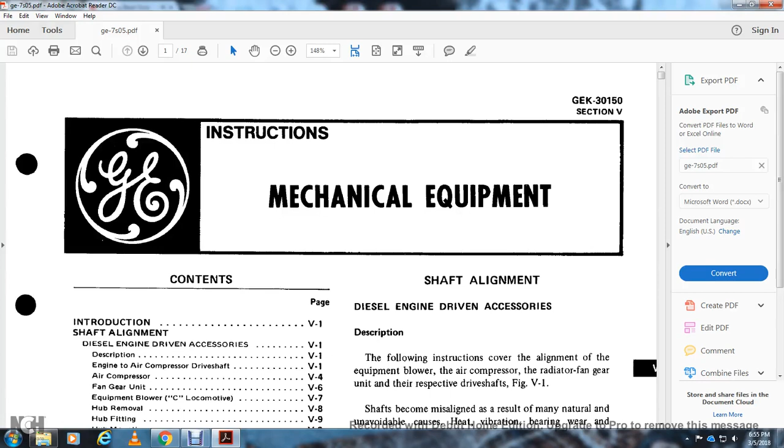General Electric Dash 7 Series, Section 5, Instruction, Mechanical Equipment.

Introduction, shaft alignment, diesel engine driven accessories description: engine to air compressor drive shaft, air compressor fan gear unit equipment blower, C locomotive hub removal, hub fitting, hub mounting data, equipment blower B locomotive, cab heater description, electrical circuits, operation, safety device, removal of heater, removal of fan motor, heater element replacement, installation of heater, installation of fan motor, installation of heater element, troubleshooting. Introduction.

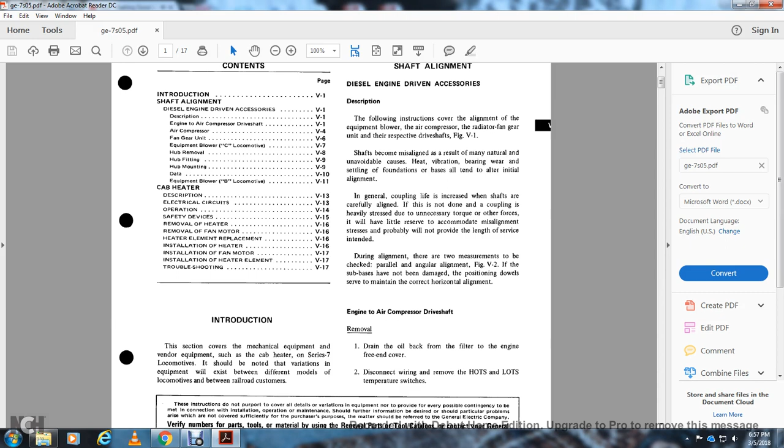This section covers the mechanical equipment and vendor equipment, especially for the cab heater on Series 7 locomotives. It should be noted that variations in the equipment will exist in different models of the locomotives between railroad customers. Shaft alignment, diesel engine accessories description.

The following instructions cover the alignment of the equipment blower, the air compressor, and the radiator fan gear unit with their respective drive shafts. Figure 5.1.

The shaft has become misaligned as a result of many natural, unavoidable causes: heat, vibration, bearing wear, and settling on the foundations, all tending to alter initial alignment. In general, coupling life is increased when the shafts are carefully aligned. If it is not done, the coupling is heavily stressed due to the unnecessary torque or other forces.

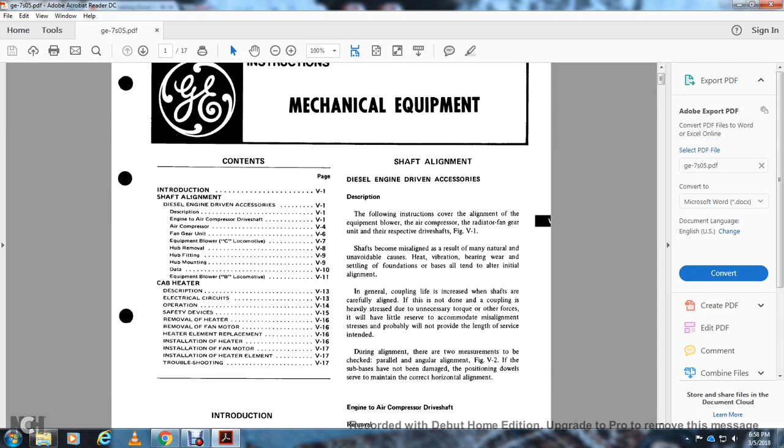It will have little reserve to accommodate misalignment. Stress probably will not provide the length of service intended. During alignment, there are two measurements to be checked: parallel and angular alignment. Figure 5.2: if the subbases have not been damaged, the position dowels serve to maintain the correct horizontal alignment.

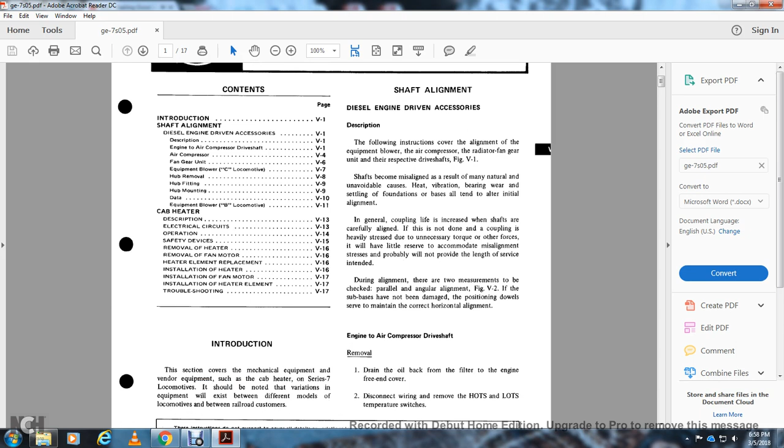Engine to air compressor drive shaft. Removal: drain the oil back from the filter to the engine, free-end cover, disconnect the wiring, and remove the HOTS and LOTS temperature switch.

Figure 5.1, engine air compressor fan gear unit arrangement: engine drive shaft, crankshaft, 3 inches, compressor sub base, fixed dial indicator, this end a magnetic chuck, rubber mount, the compressor, fan gear, drive shaft, fan gear unit, fan gear, sub base.

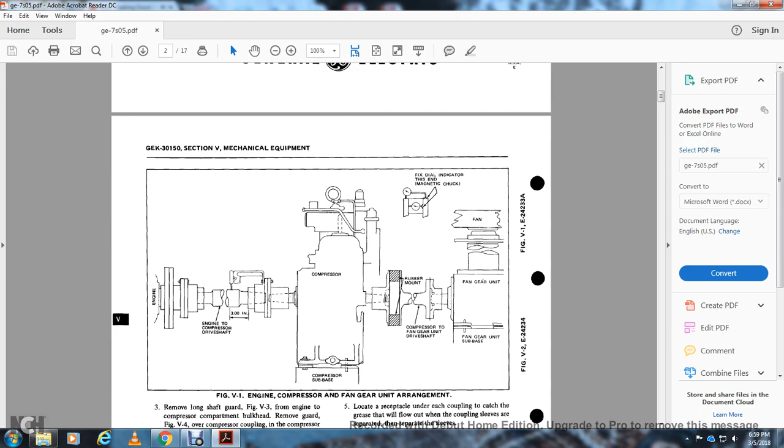Remove the long shaft guard, Figure 5.3, from the engine to the compressor compartment bulkhead. Remove the guard, Figure 5.4, over the compressor coupling within the compressor compartment.

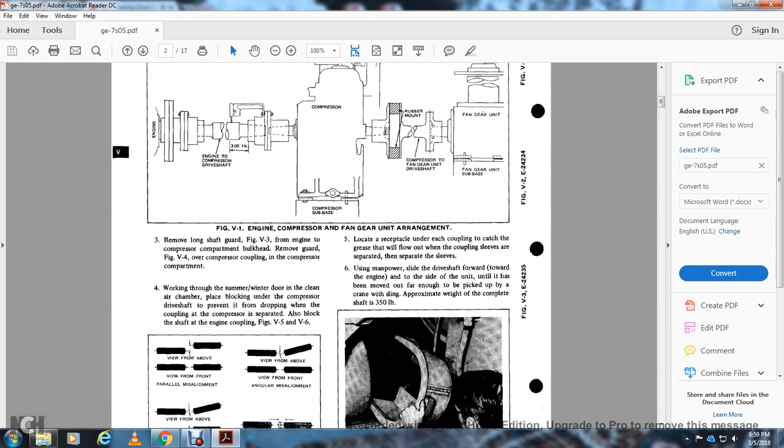Working through the summer and winter door in the clean air chamber to place the blocking under the compressor, the drive shaft, to prevent it from dropping when the coupling at the compressor is separated. Also block the shaft of the engine at the engine coupling, Figures 5.5 and 5.6.

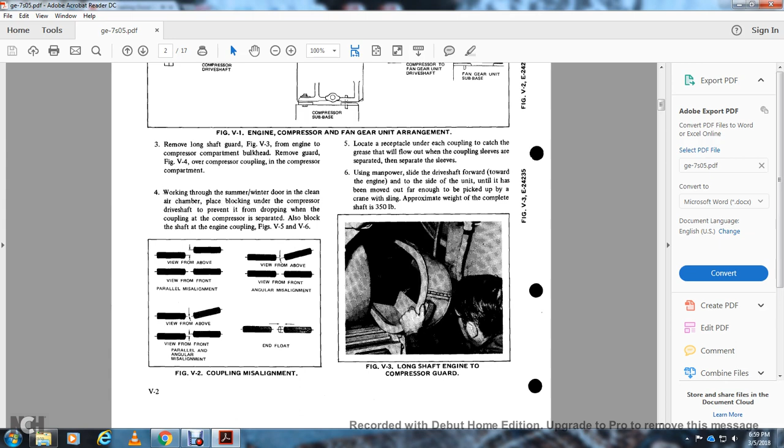Figure 5.2 shows coupling misalignment: view from above, view from the front, parallel misalignment, view from the front, angular misalignment, view from above, view from front, parallel and angular misalignment, view from above, view from front, and end float. Locate the receptacle under each of the couplings to catch the grease that will flow out of the coupling sleeve.

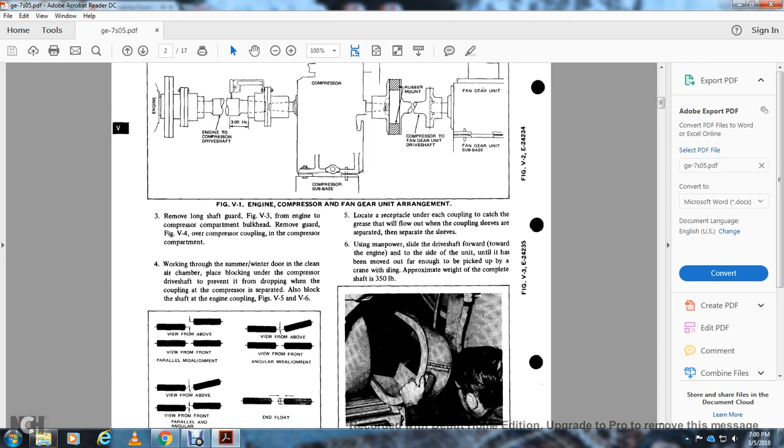Step 6: Using manpower, slide the drive shaft forward toward the engine to slide it out of the unit until it has moved far enough to pick up with the crane. Slinging approximate weight: the complete shaft is about 350 pounds. Figure 5.3 shows the long shaft from the engine toward the compressor guard.

Figure 5.4 shows the guard over the compressor coupling. Step 7: set the shaft on the floor blocks where it is protected, but repairs may be necessary.

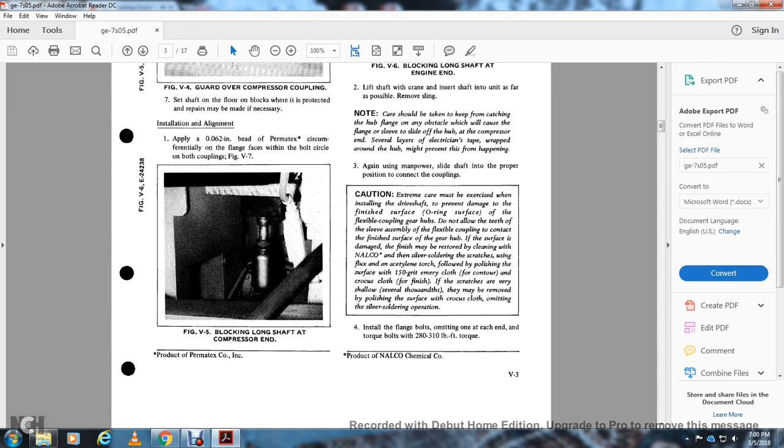Installation and alignment: apply a 62 thousandths of an inch bead of Permatex circumferentially on the flange face within the bolt circle on both couplings, Figure 5.7. Figure 5.5 shows blocking the long shaft at the compressor end. Figure 5.6 shows blocking the long shaft at the engine end.

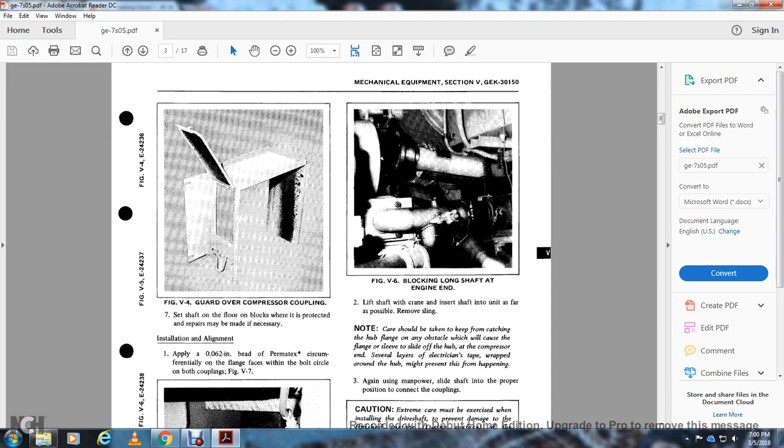Step 2: lift the shaft with the crane, insert the shaft into the unit as far as possible, and remove the sling. Note: care should be taken to keep the front of the catching hub flange away from any obstacle which would cause the flange or sleeve to slide off the hub at the compressor end. Several layers of electrician's tape wrapped around the hub might prevent this from happening.

Step 3: again using manpower, slide the shaft into the proper position to connect the couplings. Caution: extreme care must be exercised when installing the drive shaft to prevent damage to the finished surface of the O-rings of the flexible coupling gear hubs.

Do not allow the teeth of the sleeve of the flexible coupling to contact the finished surface of the gear hub. If the surface is damaged, the finish may be restored by cleaning with Nalco, then silver soldering the scratches, using flux with a acetylene torch, followed by polishing the surface with 150 grit emery cloth for the contour and crocus cloth for the finish.

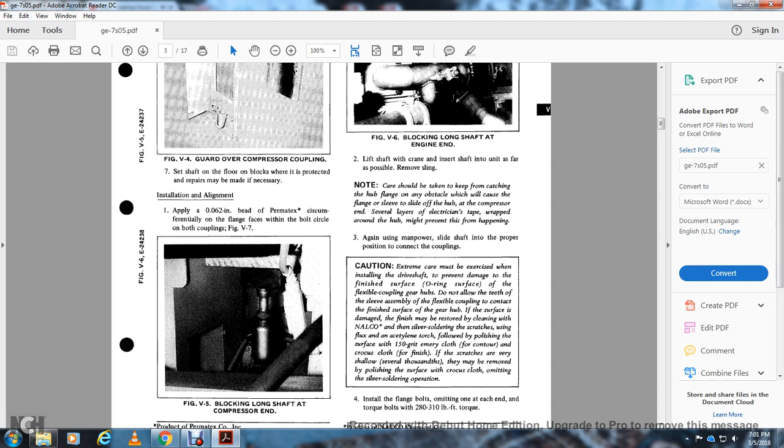If the scratches are very shallow, over several thousandths, they may be removed by polishing the surface with crocus cloth, omitting the silver soldering operation. Step 4: install flange bolts, omitting one at each end, and torque the bolts to 280 to 310 foot-pounds of torque.

Mount an indicator on the engine and the compressor for the coupling flange, utilizing the empty bolt hole, then rotate the shaft 360 degrees. Indicate the total indicating run out taken 3 inches from the hub; it should be within 5/100ths of an inch, as shown in figures 5-1, 5-8, and 5-9.

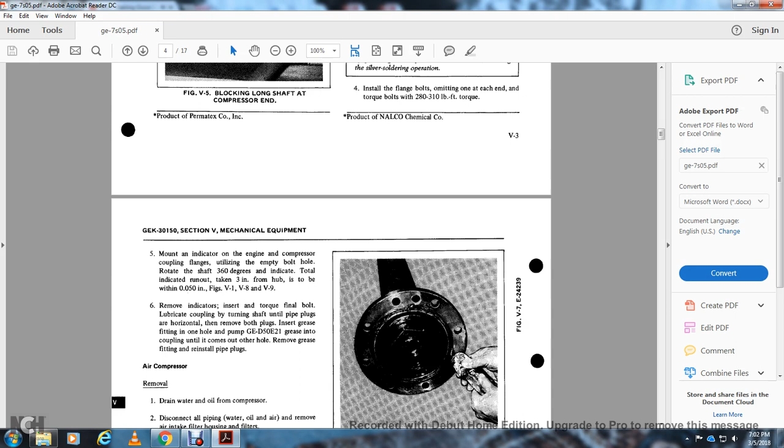Remove the indicators, insert the torque final bolt, lubricate the coupling, and turn the shaft until the pipe plug is horizontal. Remove both plugs, insert grease fittings in one hole, pump with a GE-D50E21 grease, and grease it until it comes out of the other hole. Remove the grease fitting and reinstall the pipe plugs.

Air compressor removal: drain the water and oil from the compressor. Disconnect all piping for water and oil, and remove the air intake filter housing and filters.

Remove the guard over the engine to compressor drive shaft coupling, the guard cover, and the oil pan under the fan gear unit coupling and drive shaft.

Remove the bulkhead between the air compressor chamber and the fan gear unit chamber. Remove the door post support for the bulkhead on the left side of the unit, and remove the section of handrail in the immediate area.

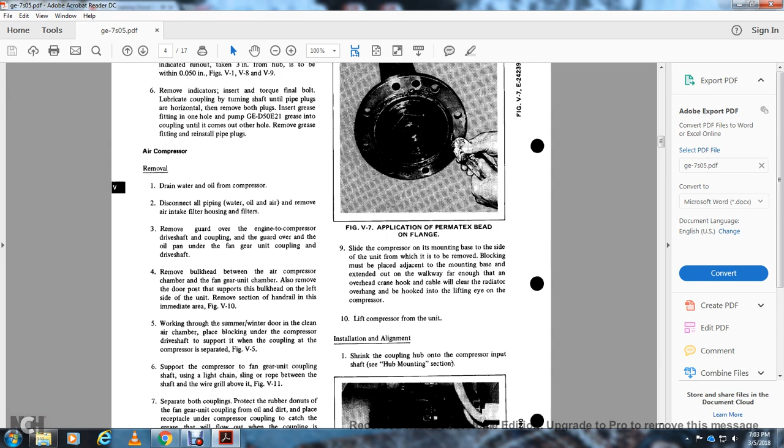Figure 5-10 shows step 5 for the removal of the air compressor. Working through the summer and winter door in the clean air chamber, place blocking under the compressor drive shaft to support it when the coupling at the compressor is separated, as shown in figure 5-5.

Support the compressor to fan gear unit coupling shaft using a light chain sling rope between the shaft and the wire grill above it, as shown in figure 5-11.

Separate both couplings to protect the rubber donuts and the fan gear unit coupling from oil and dirt. Place a receptacle under the compressor coupling to catch the grease that will flow out when the coupling is separated, shown in figure 5-12. Remove the compressor mounting bolts, shims, and dowels.

The dowel can be removed by putting several washers on the pin between the compressor foot and the dowel, then running the nut down. Tighten the nut until the dowel releases, and mark the shims when removing them so they can be reassembled in their original position when the compressor is reinstalled.

Figure 5-7 shows application of Permatex bead on the flange. Step 9: slide the compressor onto the mounting base on the side of the unit from which it was removed.

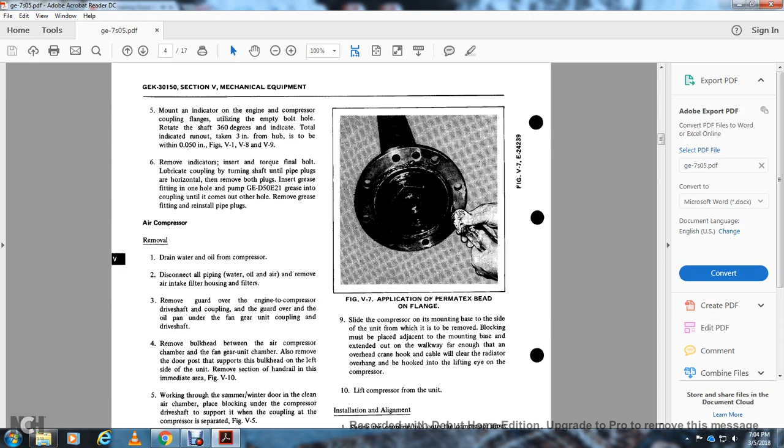Blocking must be adjacent to the mounting base, extending out on the walkway, far enough that the overhead crane hook and cable will clear the radiator overhang to be hooked to the lifting eye on the compressor. Step 10: lift the compressor from the unit.

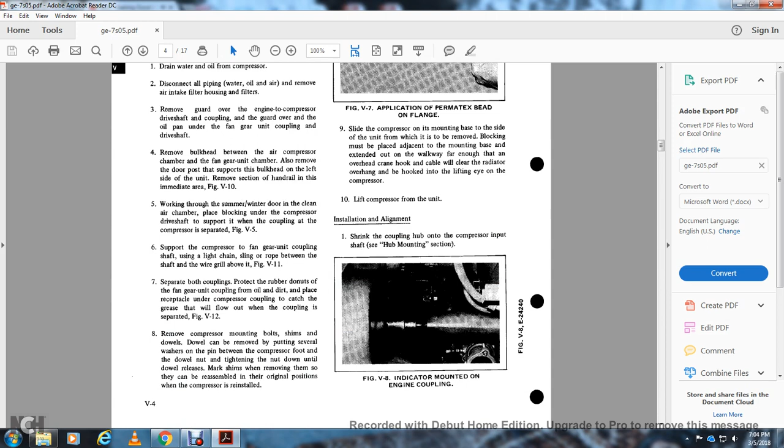Installation and alignment. Step 1: the shrinkage of the coupling hub on the compressor input shaft see Hub Mounting section. Figure 5-8 shows the indicator mounted on the engine coupling, and figure 5-9 shows the indicator mounted on the compressor coupling.

Step 2: mounting the compressor onto the sub base. If replacing the same machine, align it using the dowel holes located on each side of the compressor with those in the sub base. All shims removed during the air compressor removal must be reinstalled in their original positions.

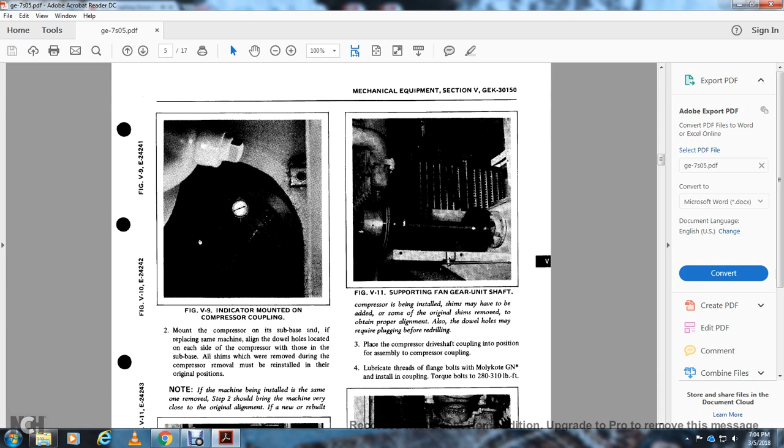Note: if the machine is the same one removed, step 2 should bring it very close to the original alignment if newly rebuilt. Figure 5-10 shows a view of the bulkhead and doorpost handrail removed.

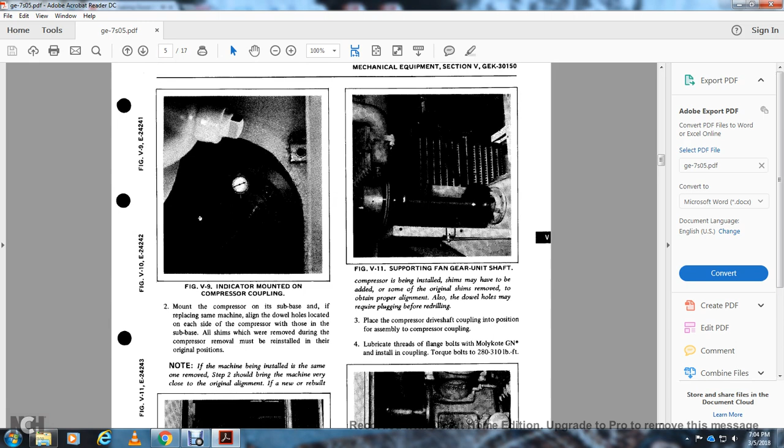Figure 5-11 shows supporting the fan gear unit shaft compressor. If a new or rebuilt compressor is being installed, shims may have to be added, or some of the original shims removed to obtain proper alignment. Also, the dowel holes may require plugging before re-drilling.

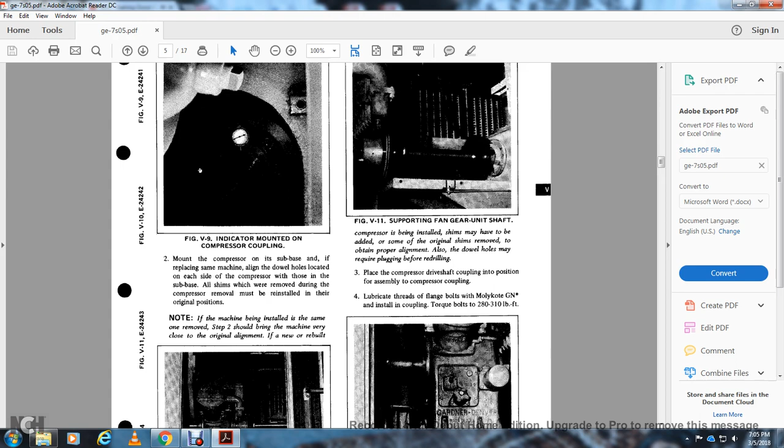Place the compressor drive shaft coupling into position for assembly with the compressor coupling. Lubricate the threads of flange bolts with Molykote GN, then install and torque the coupling bolts to 280 to 310 foot-pounds.

Figure 5-12 shows the location of the receptacle to catch grease. Install the dial indicator on the engine coupling (figure 5-13) and one on the compressor coupling (figure 5-14). Indicate the shaft 3 inches from each hub.

Rotate the shaft 360 degrees, read and total the run out. Total run out should not exceed 50/1000ths of an inch. Refer to figure 5-15 for the fixture.

Once the run out from step 5 has been obtained, lubricate the threads of the compressor bolts with Molykote GN, install the bolts, and tighten them to 400 to 450 foot-pounds of torque. Insert the dowel pins into the original holes, if aligned, or ream and install the oversized dowels.

Step 7: rotate the shaft until the grease plugs, opposite each other at the ends of the coupling, are horizontal.

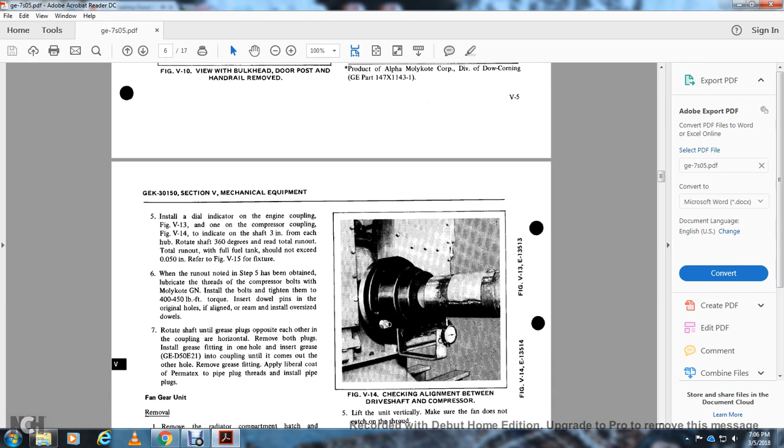Remove both plugs and install the grease fitting in one hole. Insert grease GE-D50E21 into the coupling until it comes out of the other hole. Remove the grease fitting, then apply a liberal coat of Permatex to the pipe plug threads and install the pipe plugs. This completes the fan gear unit removal preparation.

Remove the radiator compartment hatch from the radiators. Disconnect the gear unit coupling. Remove the mounting bolts, dowels, and shims. Mark the shims so they can be reinstalled in their original position. Remove the bolt in the end of the fan shaft and insert the lifting eye bolt.

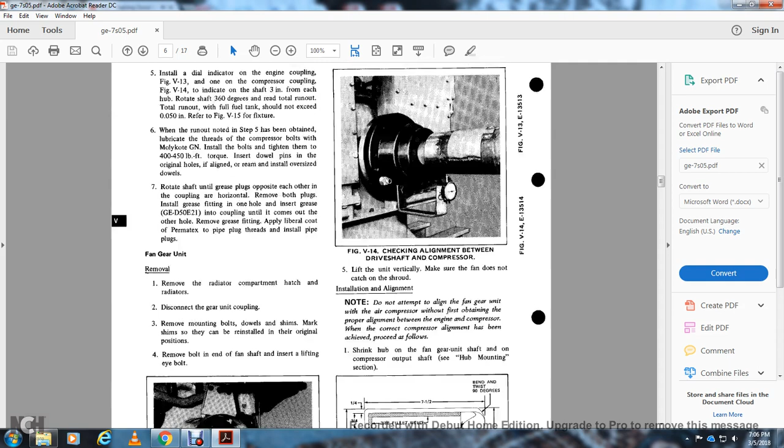Figure 5.13 shows the checking of alignment between the drive shaft and the diesel engine. Figure 5.14 shows the checking of alignment between the drive shaft and the compressor.

Lift the unit vertically, making sure the fan does not catch on the shroud.

Installation and alignment note: do not attempt to align the fan gear unit with the air compressor without first obtaining the proper alignment between the engine and compressor. When the correct compressor alignment has been achieved, proceed as follows.

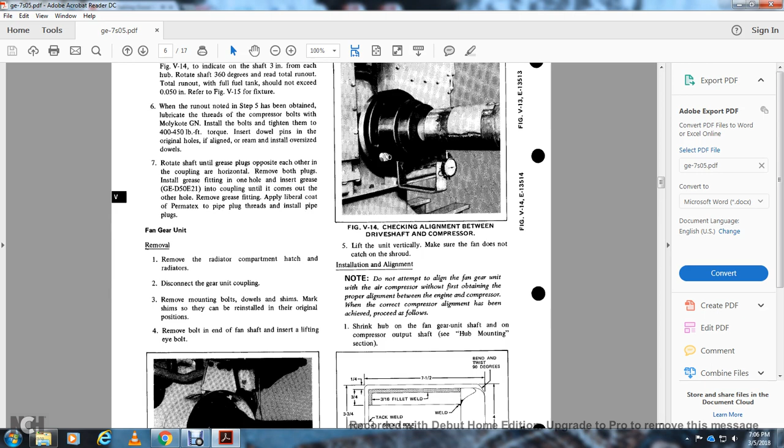Shrink the hub of the fan gear unit shaft onto the compressor output shaft, see the hub mounting section. Figure 5.15 shows the indicator holding fixture alignment over the alignment of the compressor drive shaft.

This shows the fillet weld, the tack weld, and lock washer nut with a weld and a 1/4 inch by 1 inch bolt, all dimensions in inches, bent and twisted 90 degrees.

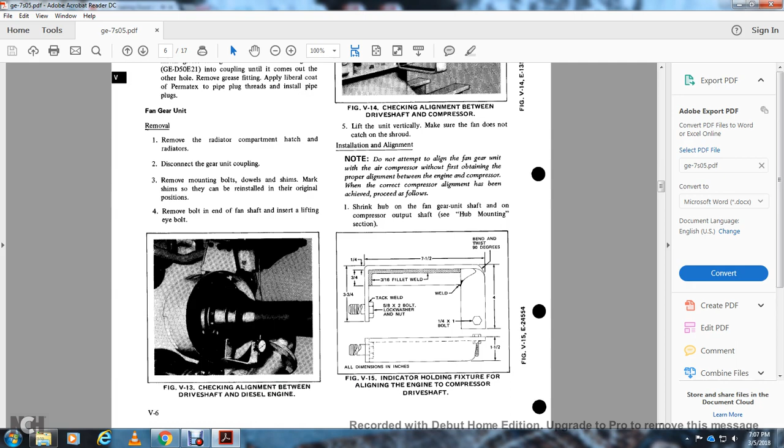Install the drive shaft of the fan gear unit shaft hub. Lubricate the bolt threads with Molykote GN and tighten to 280 to 310 pounds of torque.

Mount the fan gear unit onto the sub base. Replace the shims as they were prior to removal to maintain 3 to 3 and 3/100ths of an inch between the hubs, and 3/8 of an inch between the ends of the fan blade and the fan shroud opening.

Note: if the same unit is being reinstalled, remove step 3; this should bring the unit very close to the original alignment. If a new or rebuilt unit is being installed, the shims may have to be adjusted to obtain proper alignment.

For mounting, indicate the large compressor coupling flange with an indicator on the outside diameter of the gear unit flange. Rotate the fan gear flange and check the total runout. The total indicator runout should not exceed 1/100th of an inch.

Figures 5.16 and 5.17: clean out the bolt holes in the rubber mounts of the mounting sandwich. Use the correct length of bolt to prevent bottoming the bolt and pulling it out of the nut when tightening the mounting bolts.

Install the rubber mounts, lubricating the bolt threads with Lubriplate, and tighten to 28 to 30 foot-pounds of torque. When tightening the bolts, avoid twisting the rubber mounts; the molded lines on the mount should be visibly straight after tightening.

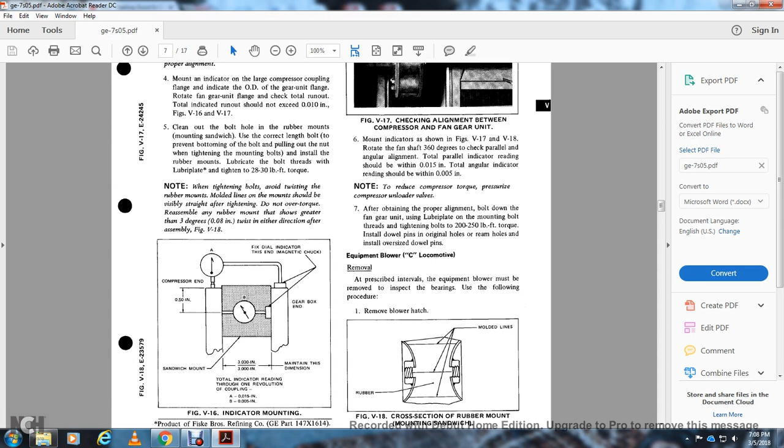Do not over torque. Reassemble any rubber mount that shows greater than 3 degrees or 0.08 of an inch twist in either direction.

Assembly figure 5.18 and 5.16 show the indicator mounting. The compressor end is at 1/2 inch with the sandwich mount at 3 to 3 and 3/100ths of an inch; maintain this dimension at the gearbox end, with the indicator on the fixed dial.

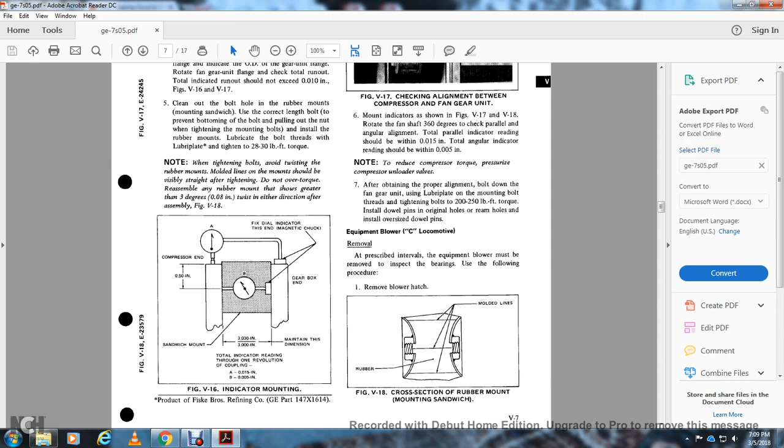With the indicator chuck engaged, the total indicator reading through one revolution of the coupling should be 15 thousandths for A, and B would be 5 thousandths of an inch. Figure 5.17 shows checking alignment between the compressor and fan gear unit.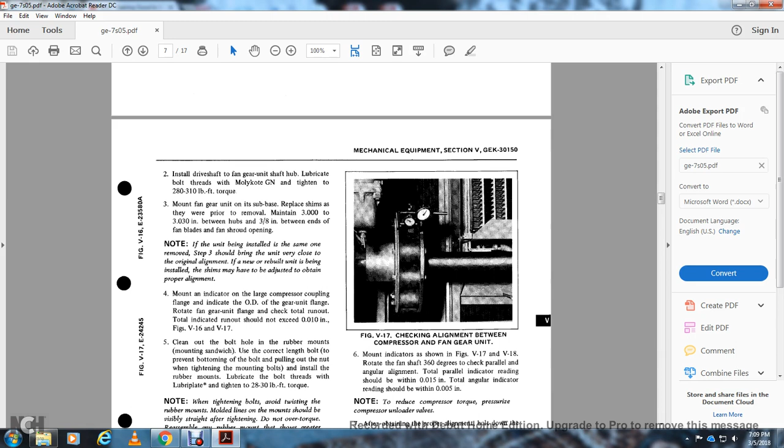Step 6: mounting the indicator as shown in figures 5.17 and 5.18, rotate the fan shaft 360 degrees to check parallel and angular alignment. Total parallel indicator reading should be within 15 thousandths of an inch, and total angular indicator reading should be within 5 thousandths of an inch.

Note: to reduce the compressor torque, pressurize the compressor unloader valves. After obtaining the proper alignment, bolt down the fan gear unit using Lubriplate on the mounting bolt threads, and tighten the bolts to 200 to 250 pounds of torque.

Install the dowel pins in the original holes and ream holes. Install oversize dowel bolt pins.

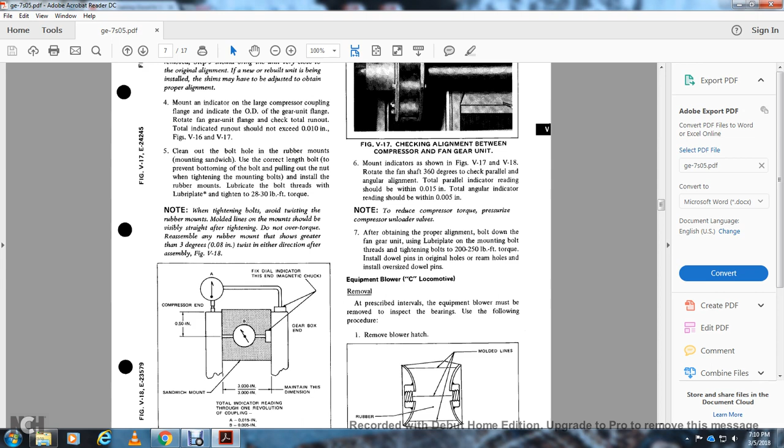Equipment blower locomotive removal: as prescribed in the intervals, the equipment blower must be removed to inspect the bearings using the following procedures. Remove the blower hatch. Figure 5.18 shows the cross section of a rubber mounted mounting sandwich, with the rubber and the molded lines.

Remove the bolted-in section bulkhead around the blower drive with the coupling in the generator compartment. Disconnect the flexible coupling by removing the 2 bolts at each end of the coupling (figure 5.18). Remove the dowel pins and blower mounting bolts, and save the shims since they must be replaced in the original position upon reinstallation. Insert the lifting eye and lift out the blower.

Installation alignment: shrink the hubs onto the power takeoff shaft and the blower shaft. See the hub mounting section.

Mount the blower on the sub-base, aligning the dowels with the holes, and replace the shims removed during blower removal. Note: if the blower is being reinstalled in the same unit, this step should bring the blower close to its original alignment. If a new or rebuilt blower is being installed, shims may be adjusted to obtain proper alignment.

The coupling must be disassembled for installation. Remove the 2 bolts on both ends that screw the coupling flange to the flex pack of the coupling hub (figure 5.19). Bolt these flanges to the blower and power takeoff hubs. Torque the flange mounting bolts to 30 to 35 pounds of torque.

Clean the bolt, nut, and threads with safety solvent, wipe dry, and apply Loctite sealant to the bolts before screwing into the flange. Assemble the bolts and immediately torque the 4 bolts at the end of each coupling to 115 to 120 pounds of torque.

Figure 5.19 shows the blower coupling removed, and figure 5.20 shows an indicator mounted on each hub, indicating 5 inches on the shaft at each end. As shown in figure 5.20, adjust the shims under the blower until the total indicator run-out is within 2/100ths of an inch. See figure 5.21 for the fixture.

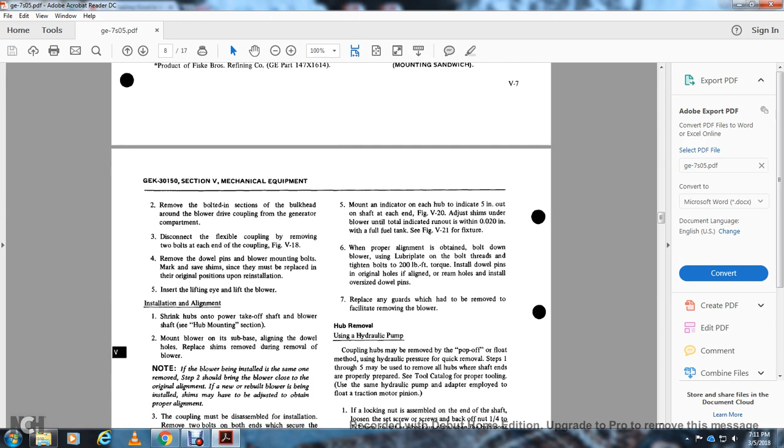When proper alignment is obtained, bolt down the blower using a lubricant on the bolt threads, tightening the bolts to 200 foot-pounds of torque. Install the dowel pins into the original holes, reaming the holes and installing oversized dowel pins as needed. Replace any guards that had to be removed to facilitate removing the blower.

Hub removal: using a hydraulic pump, coupling hubs may be removed by the pop-off or float method using hydraulic pressure for quick removal. Steps 1 through 5 may be used to remove all hubs where the shaft ends are properly prepared. See the tool catalog for proper tooling; use the same hydraulic pump and adapter employed to float the traction motor pinion.

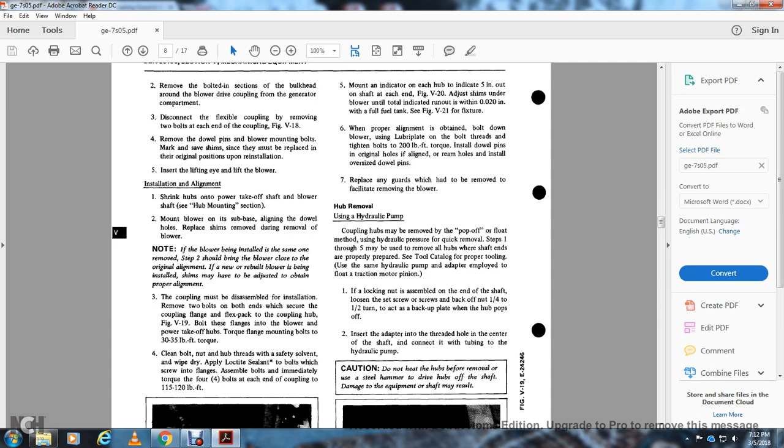If a locking nut is assembled at the end of the shaft, loosen the set screws and back off the nut 1/4 to 1/2 turn to act as a backup plate when the hub pops off. Then insert the adapter into the threaded hole in the center of the shaft, connecting it with tubing to the hydraulic pump.

Caution: do not heat the hubs before removal, and do not use a steel hammer to drive the hubs off the shaft. Damage to the equipment or shaft may result.

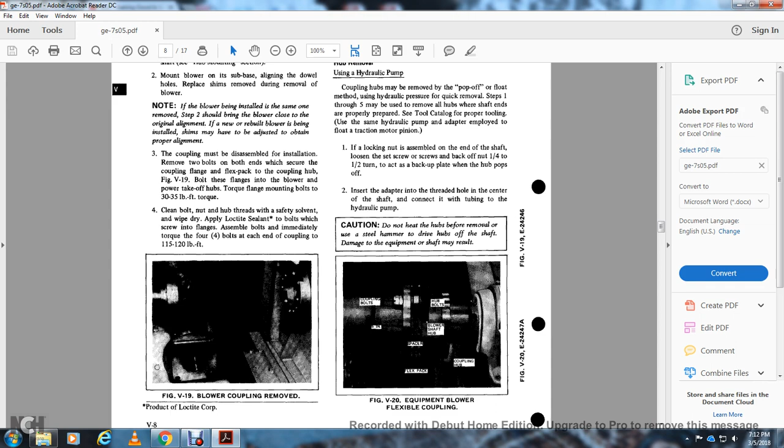Figure 5.20 shows the equipment: blower flexible coupling bolts, 5 inches, the hub bolts, the blower shaft hub, the spacer, a flex pack, and a coupling hub.

Figure 5.21 shows the indicator holding fixture for alignment of the equipment blower with the power takeoff shaft. All dimensions in inches: 1/4 inch, 2.5 inch, 1 inch weld, 1/2 inch, 1/4 inch round rod welded in, and a 1/4 inch end nut weld.

Pump with enough pressure to force oil into the shaft groove, using 10 to 20 strokes normally sufficient for the hub to release. Remove the pump assembly from the shaft.

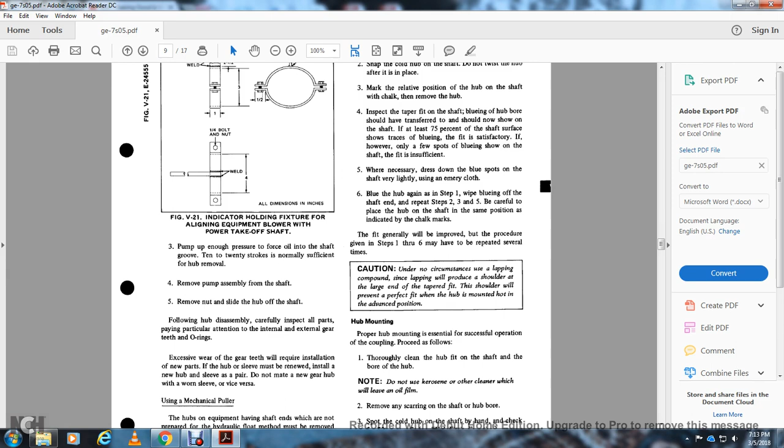Remove the nut and slide the hub off the shaft. Following hub disassembly, carefully, inspecting all parts and paying particular attention to the internal and external gear teeth and the O-rings. Excessive wear of the gear teeth will require installation of new parts. If the hub and sleeve are renewed, install the new hub and sleeve as a pair. Do not mate a new gear hub with a worn sleeve, or vice versa.

Using a mechanical puller, hubs on equipment with shaft ends not prepared for the hydraulic float method must be removed using the hub puller tool.

Hub fitting: to prevent the hub from slipping, it should have at least 75% contact of the tapered bore with the tapered fit on the shaft. Check the correct fit before heating the hub for mounting, as follows.

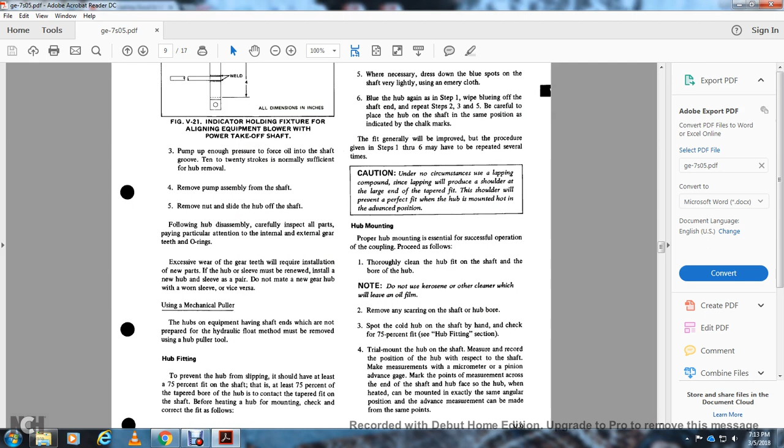1. Lightly cover the hub bore with a bluing compound such as Prussian blue oil pigment. 2. Snap the cold hub onto the shaft; do not twist the hub after it's placed. 3. Mark the relative position of the hub on the shaft with chalk, then remove the hub.

Inspect the tapered fit on the shaft; the bluing on the hub bore should transfer to the shaft, showing at least 75% of the shaft surface with traces of bluing for a satisfactory fit. If only a few spots of bluing show on the shaft, the fit is insufficient.

Step 5: Dress down the blue spots on the shaft very lightly using an emery cloth. Step 6: Blue the hub again as in step 1, wiping the blue off the shaft end. Repeat steps 2, 3, and 5. Be careful to place the hub on the shaft in the same position as indicated by the chalk marker.

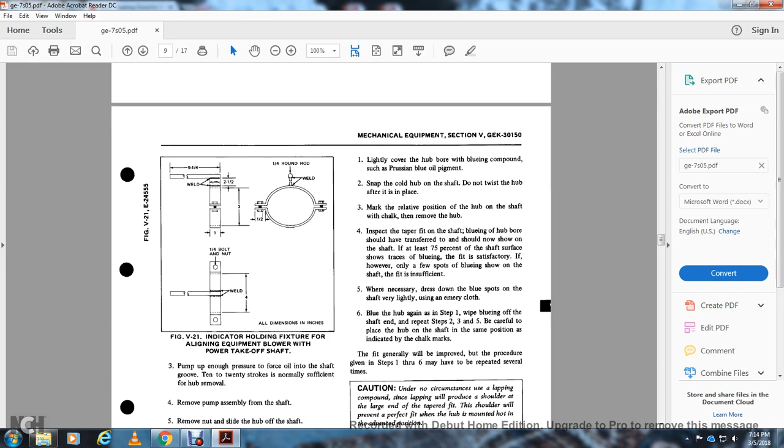The fit generally will be improved, but the procedure given in steps 1 through 6 may have to be repeated several times. Caution: under no circumstances use lapping compounds, since lapping will produce a shoulder at the large end of the tapered fit. This shoulder will prevent a perfect fit when the hub is mounted hot in the advanced position.

Hub mounting. Proper hub mounting is essential for the successful operation of the coupling. Proceed as follows: thoroughly clean the fit on the shaft and the bore of the hub. Note: do not use kerosene or other cleaner that will leave an oil film. Remove any scarring on the shaft or the hub bore.

Step 3: Spot the cold hub on the shaft by hand and check for 75% fit of the hub fitting section. Step 4: Trial mount the hub on the shaft. Measure and record the position of the hub with respect to the shaft.

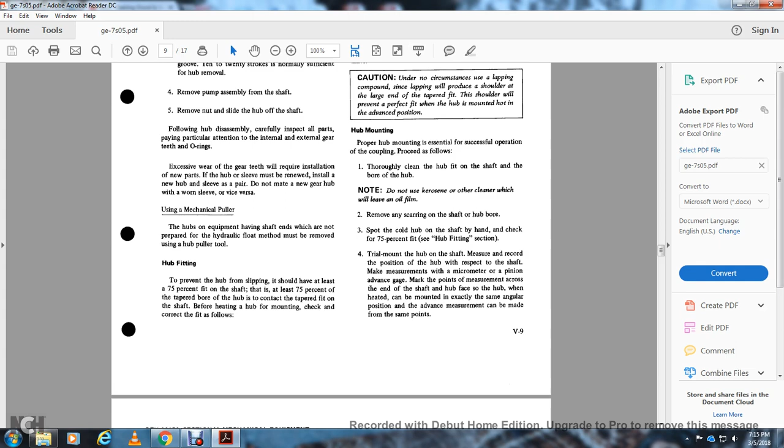Make measurements with a micrometer or pinion advance gauge. Mark the points of measurement across the end of the shaft and the hub face so that the hub, when heated, can be mounted in exactly the same angular position, and the advance measurement can be made from these same points.

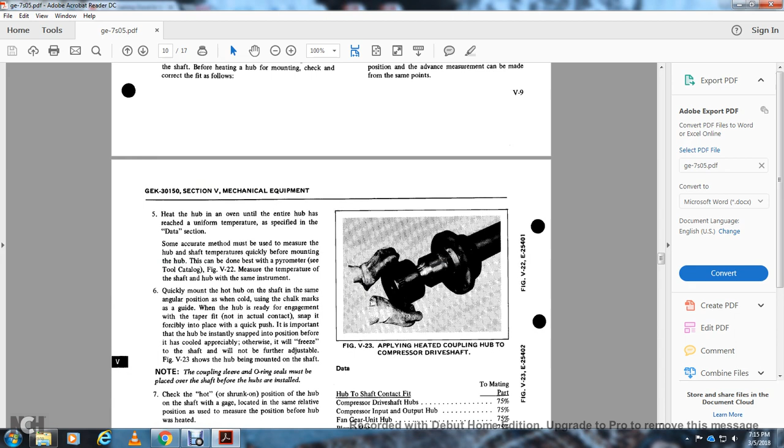Step 5: Heat the hub in an oven until the entire hub reaches the uniform temperature specified in the data section. Some accurate method must be used to measure the hub and shaft temperatures quickly before mounting the hub. This can best be done with a pyrometer.

See tool catalog figure V-22. Measure the temperature of the shaft and the hub with the same instrument. Quickly mount the hub on the shaft in the same angular position as when cold, using the chalk marks as a guide.

When the hub is ready for engagement with the tapered fit, but not yet in actual contact, snap it forcibly into place with a quick push. It's important that the hub be instantly snapped into position before it cools.

Otherwise, it will freeze to the shaft and not allow further adjustment. Figure V-23 shows the hub being mounted on the shaft.

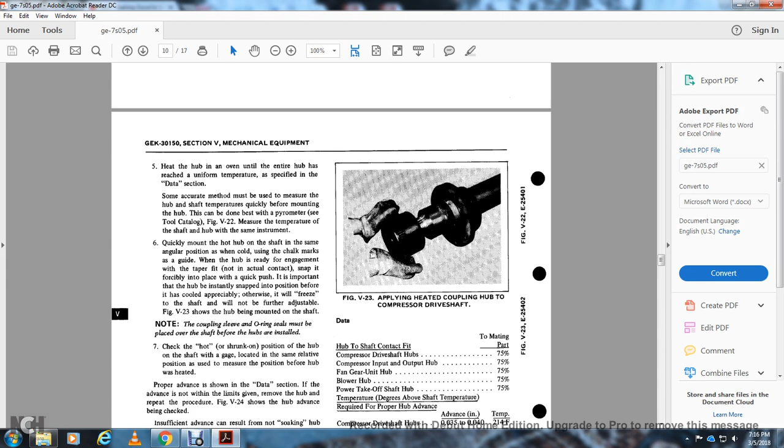Note: the coupling sleeve and the O-ring must be placed over the shaft before the hubs are installed. Check the hot or shrunk-on position of the hub on the shaft using the gauge located in the same relative position used to measure the position before the hub was heated.

Proper advance is shown in the data section. If the advance was not within the limits given, repeat the procedure. Figure V-24 shows the hub and advance being checked. Insufficient advance can result from not soaking the hub at an elevated temperature for sufficient time, or not having the temperature high enough.

Remember that the temperature shown in the data section is the difference above the shaft temperature that the oven should be set at. Insufficient advance can cause the coupling to slip.

Less often achieved, but just as great a problem, is the case of over-advancement. This can cause cracked hubs and resulting failure.

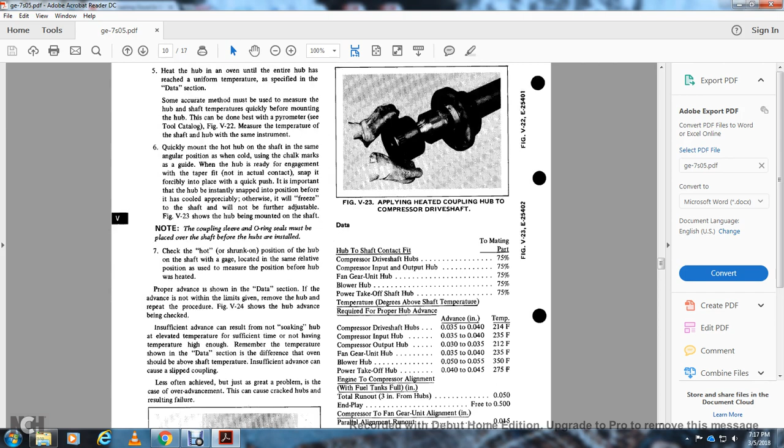Figure V-22 shows using a pyrometer to check the hub temperature. Figure V-23 shows applying the heated coupling hub to the compressor drive shaft.

Your data: hub-to-shaft fit. Compressor drive shaft hub 75%, compressor input and output hub 75%, fan gear unit hub 75%, blower hub 75%, power takeoff shaft hub 75%. Temperatures in degrees above shaft temperature required for proper hub advancement, given as advancement in inches and temperature.

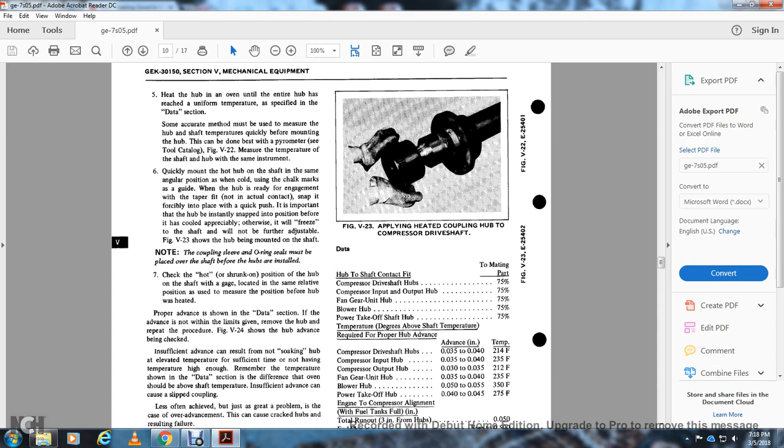Fan gear unit hub: 0.035 to 0.040 of an inch, 235 degrees Fahrenheit. Blower hub: 0.050 to 0.055 of an inch, 350 degrees Fahrenheit. Power takeoff hub: 0.040 to 0.045 of an inch, 275 degrees Fahrenheit.

Compressor to fan gear alignment in inches. Parallel alignment runout: 15 thousandths of an inch. Angular alignment: 2.5 inches radius from the centerline, 1/100th of an inch. Blower alignment with full fuel tanks: total runout 50 thousandths of an inch.

Torque values in foot-pounds of torque. Compressor drive shaft coupling flange bolts: 280 to 310. Rubber-sandwich mounting bolts: 28 to 30.

Blower coupling flange mounting bolts: 30 to 35. Blower coupling flange bolts: 80. Compressor mounting bolts: 400 to 450.

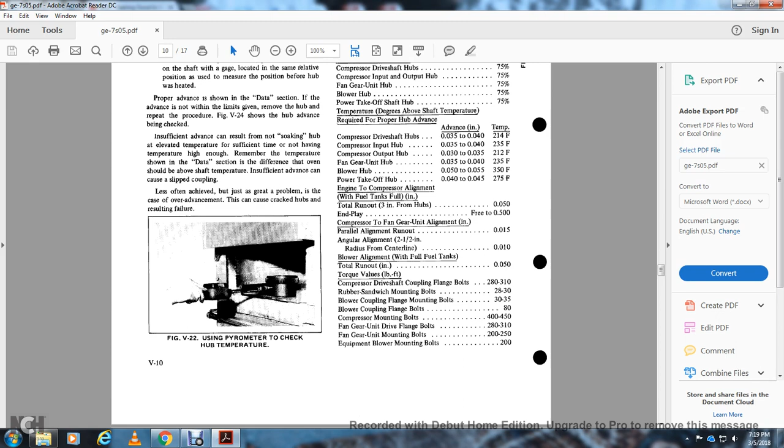Fan gear unit drive flange bolts: 280 to 310. Fan gear unit mounting bolts: 200 to 250. Equipment blower mounting bolts: 200.

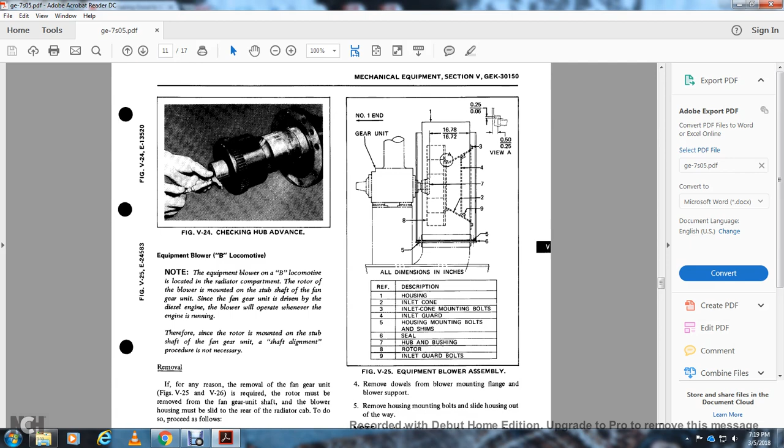Figure 524 shows checking the hub advancement on the equipment B locomotive. Note the equipment blower on the B locomotive is located within the radiator compartment. The rotor of the blower is mounted on the stub shaft of the fan gear unit. Since the fan gear unit is driven by the diesel engine, the blower operates whenever the engine is running. Therefore, since the rotor is mounted on the stub shaft of the fan gear unit, a shaft alignment procedure is not necessary.

Removal: if there is any reason for removal of the fan gear unit, figures 525 and 526 apply. The rotor must be removed from the fan gear unit shaft of the blower, and the housing must be slid off the rear of the radiator cab. To do this, proceed as follows.

1. Remove the 6 bolts holding the inlet guard in place and remove the guard. 2. Remove the 16 nuts holding the inlet cone to the housing and remove the cone.

3. Remove the rotor as follows. A. Remove the 2 Allen head mounting screws. B. Insert one of the screws in the jacking removal hole, torque down. If the bushing does not loosen, and tap the rotor hub while applying torque on the screw. C. Slide the rotor from the stub shaft and housing.

4. Remove the dowels from the blower mount flange and blower support. 5. Remove the housing mounting bolts, sliding the housing out of the way. Mark the shims removed so that they may be placed in their original position when the gear unit is reinstalled.

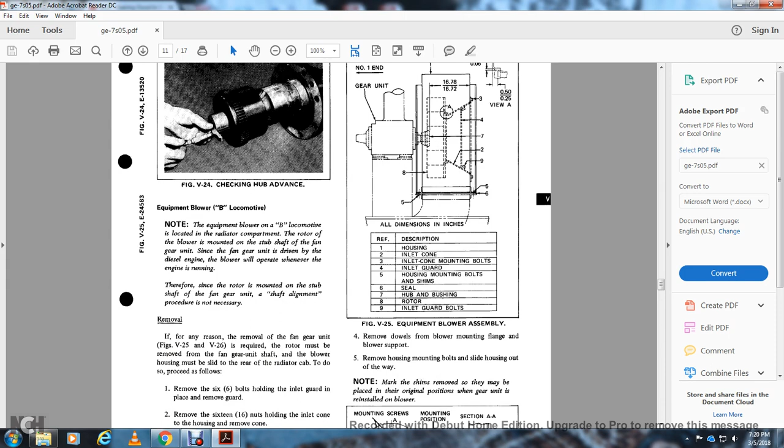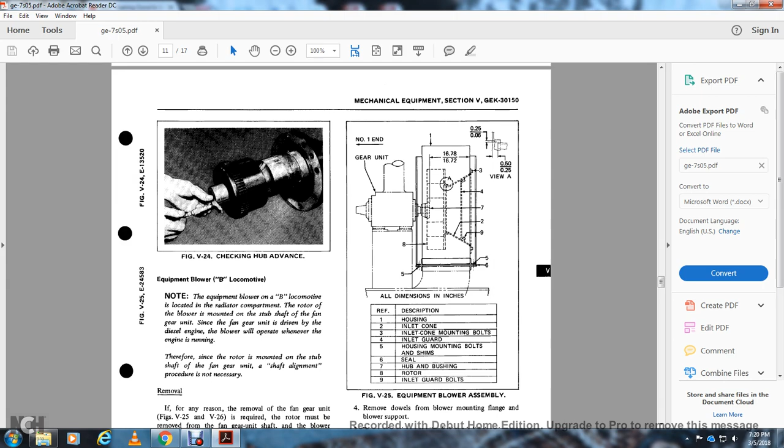Figure 525 shows the equipment blower assembly. 1 is the housing, 2 is the inlet cone, 3 is the inlet cone mounting bolts, 4 is the inlet guard, 5 is the housing mounting bolts and shim, 6 is the seal, 7 is the hub and bushing, 8 is the rotor, and 9 is the inlet guard bolt.

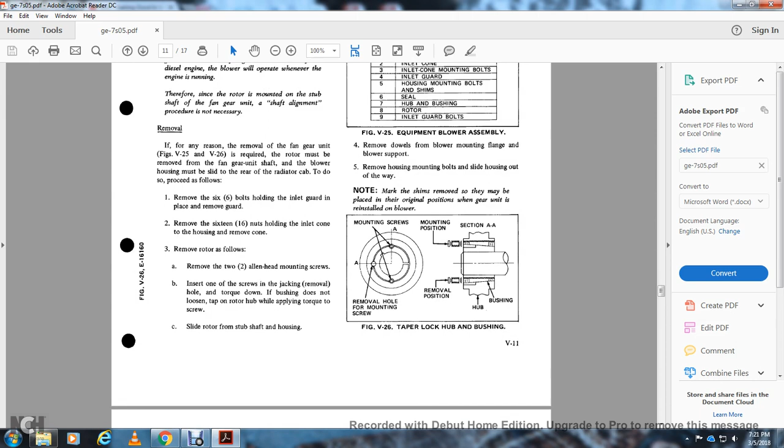Installation: when the gear unit is installed in line with the compressor and/or engine, proceed as follows. Be sure the blower support is free of dirt and oil; clean with safety solvent and mineral spirits D588. If seals on the blower support are damaged, replace them by activating adhesive on new seals using safety solvent and applying new seals to the blower support. 3. Position the blower housing in line with the dowel pins.

Replace dowel holes and the shims in their original position. Align the blower support to a 5.5 inch diameter opening, with the housing to fan gear unit shaft within plus or minus 6/10 of an inch on the radius. Align the inlet side of the blower housing within 17.030 to 16.970 of an inch, vertical and horizontal to the end of the shaft. Use the sweeping tool shown in figures 527 and 528.

Mount the housing in place and torque the mounting bolts to 180 to 215 pounds of torque. Assemble the rotor as follows.

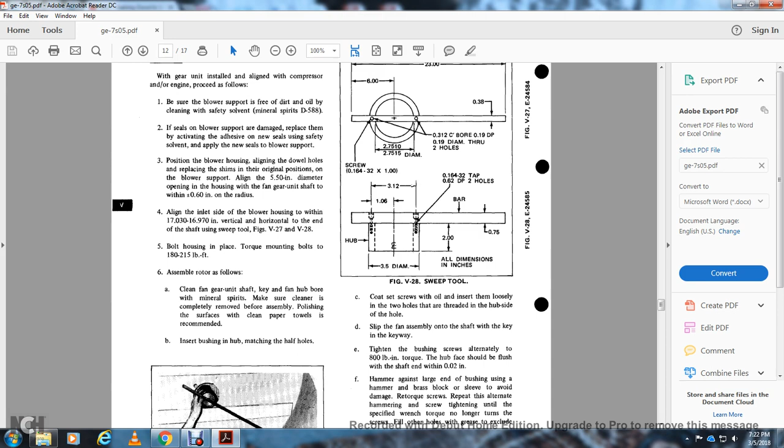Clean the fan gear unit shaft key and fan hub bore with mineral spirits; make sure cleaner is completely removed before assembly. Polishing the surface with clean paper towels is recommended. Insert the bushing in the hub, matching the half holes.

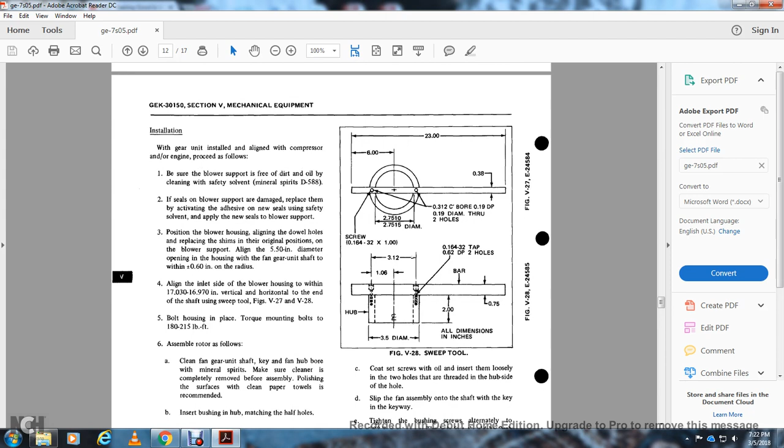Figure 527 shows making the sweep tool measurements. Figure 528 shows the sweeping tool, including the screw and diameter, the bore holes in the hub, the tap holes, and dimensions.

Coat the set screws with oil, insert them loosely in the two holes, that are threaded in the hub side of the hole. D. Slip the fan assembly onto the shaft with the key in the keyway.

E. Tighten the hub bushing screws alternately to 800 inch-pounds of torque. The hub face should be flush with the shaft end within 0.02 of an inch.

Hammer against the large end of the bushing. Tighten the bushing alternately to 800 inch-pounds of torque, and the hub face should be flush with the shaft end within 0.02 of an inch. When hammering against the large end of the bushing, use a hammer and brass block or sleeve to avoid damage.

Retorque the set screws, repeating the alternate hammering and screw tightening until the specified wrench torque no longer turns the screw. Fill the other holes with grease to exclude dirt.

Replace the inlet cone, using caulk between the housing and the cone. Adjust the cone to the dimension between the rotor and the cone as shown in figure 525.

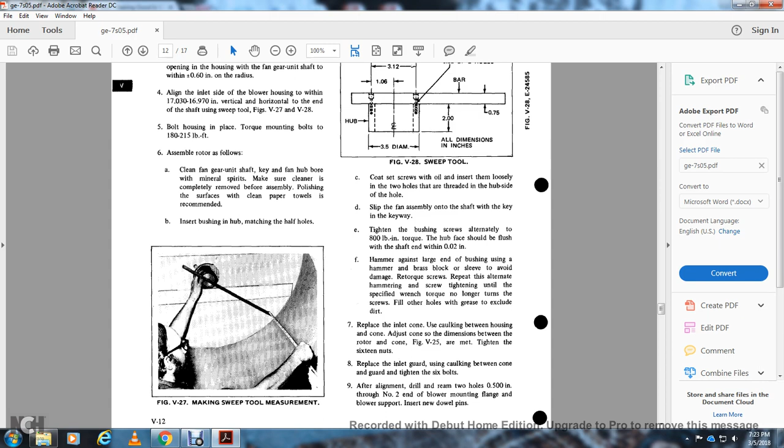Tighten the 16 nuts. Place the inlet guard using caulking between the cone and the guard, tightening the 6 bolts. After alignment, drill and ream the 2 holes to 0.500 of an inch through the blower mounting flange and blower support, and insert new dowel pins.

The cab heater is self-contained and electrically heated, located in the locomotive cab in the short hood. The cab houses the heating elements, motor and blower, with overheat switches and terminals for the external power connectors.

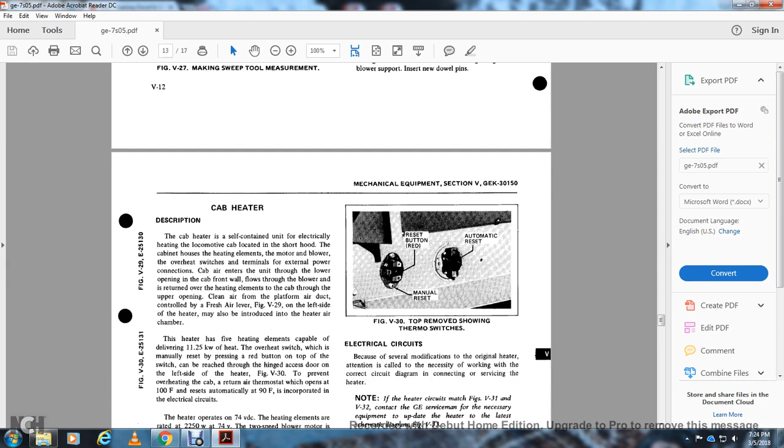Cab air enters through the lower opening of the cab front wall and flows through the blower, returning through the heating elements and into the cab through the upper opening. Clean air comes from the platform through the air duct, controlled by the fresh air lever. As shown in Figure V-29, air on the left side of the heater may also be introduced through the heater air chamber.

The heater has 5 heating elements capable of delivering 11.25 kilowatts of heat, with an overheat switch that is manually reset. Pressing the red button on top of the switch can be reached through the hinged access door on the left side of the heater.

As shown in Figure V-30, to prevent overheating of the cab, a return air thermostat opens at 100 degrees Fahrenheit and automatically resets at 90 degrees Fahrenheit. This is incorporated into electrical circuits; the heater operates at 74 volts DC.

Heating elements are rated at 2250 watts at 74 volts. The 2-speed blower motor is rated at 0.167 to 0.220 horsepower, 860 to 1160 RPMs, 3 to 4 amps, and 74 volts DC. Motor speed is varied by switching in a 100 ohm, 100 watt field resistor.

Figure V-29 shows the heater air inlets and outlets: the cold air inlet and fresh air 4-inch hose connection, hot air discharge, access door, thermo switches, and control wiring.

Figure V-30 shows the top removed, revealing the thermo switches. Press the red reset button for manual reset, or allow automatic reset.

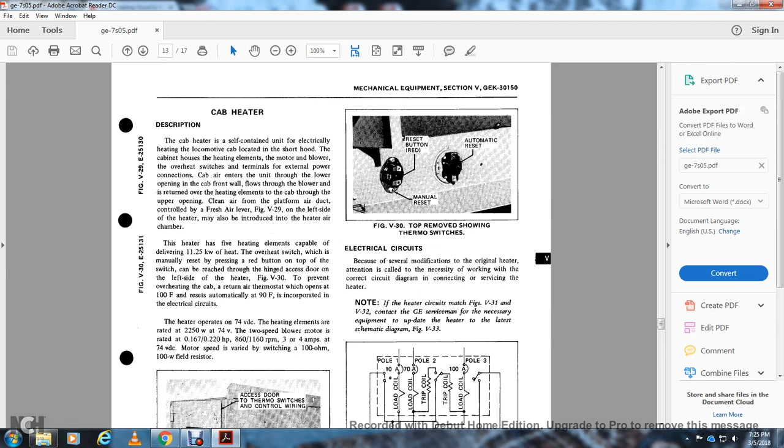Regarding electrical circuits: because of several modifications of the original heater, attention must be called to the necessity of working through the correct circuit diagram matching the specific heater. If the heater circuit matches Figures V-31 and V-32, contact the GE service man for the necessary equipment to update the heater to the latest schematic diagram, Figure V-33.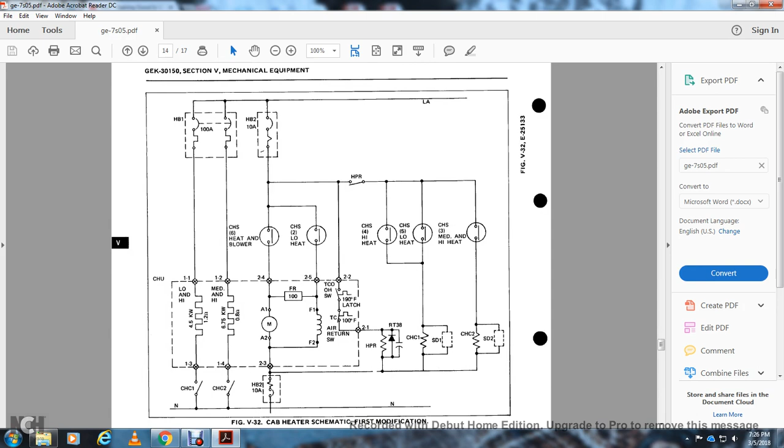Figure V-32 shows the cab heater schematic. You have a diode, field currents, SD1, resistors, a motor, the cab heat blower, and cab heat low heat operation. The circuit is closed with HB1 and HB2.

Figure V-33 shows the location in the toilet compartment. Set the cab heater switch. When set at the blower-only position, contact 6 is closed, allowing the fan motor to run at full speed, 1160 RPMs.

When the cab heater switch is set for low heat, contacts 2, 5, and 6 are closed, causing the fan motor to run at reduced speed, 860 RPMs. With cab heater contactor 1 picked up, the 4.5 kilowatt heater element is energized, furnishing low heat to the operator's cab.

When the cab heater switch is set at medium heat, contacts 3 and 6 are closed, causing the fan motor to run at high speed. With heat contactor 2 picked up, the 6.75 kilowatt heat element is energized, furnishing medium temperature heat to the operator's cab.

When the cab heater switch is set at high heat, contacts 3, 4, and 6 are closed, causing the fan motor to run at high speed. With heat contactors 1 and 2 both picked up, the 4.5 and 6.75 kilowatt heater elements are both energized, furnishing high temperature heat to the operator's cab.

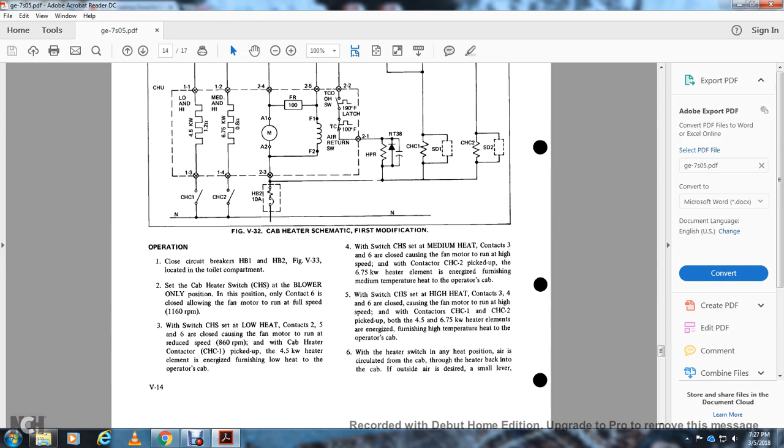With the heat switch in the heat position, air is circulated through the cab, through the heaters, and back into the cab, or outside as desired, using the small lever.

Figure V-33 shows the cab heater switch for the second modification. This shows the cab heater control and cab heater contactors 1 and 2.

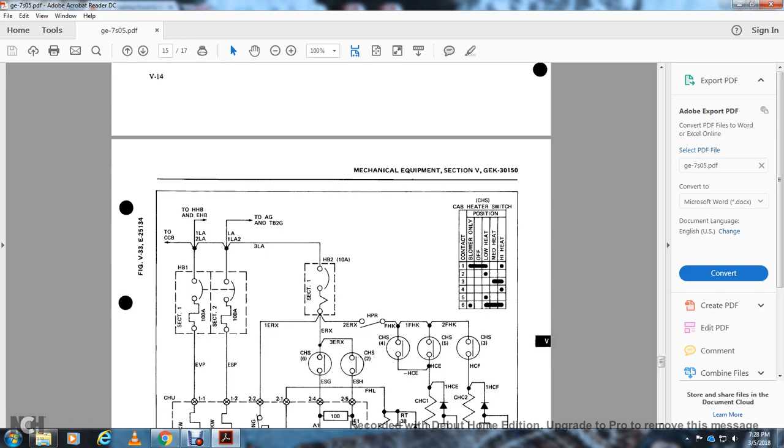Safety devices: there are 2 thermal switches, shown in Figure V-30, one with automatic reset, the other manual reset. When the temperature reaches 100 degrees Fahrenheit, the automatic reset thermostat opens to de-energize the heat pressure relay (HPR), and in turn contacts cut power to the heaters, de-energizing contactors CHC1 and CHC2.

The fan motor will still run at high speed. When the temperature drops to 90 degrees Fahrenheit, it will switch to automatic reset. Should the automatic reset thermal switch fail and temperature reach 200 degrees Fahrenheit, the manual switch opens again, cutting power to the heaters until the switch is reset.

Open the door and remove the cover on the left side of the heater housing. Reach through the trough over the heat elements, then press the red reset button down on the thermal switch.

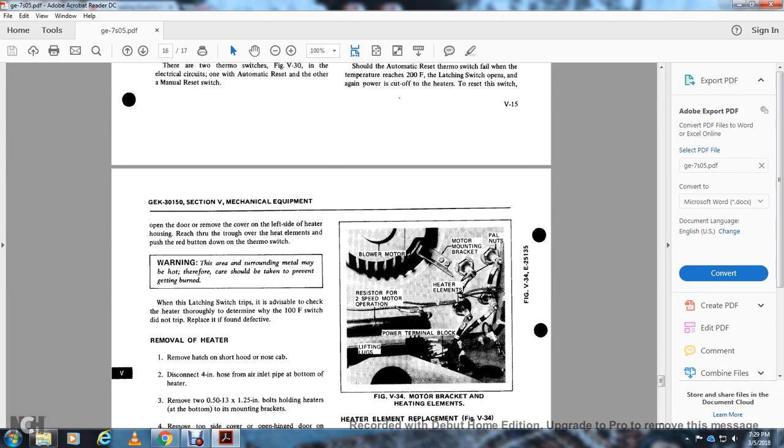Warning: the surrounding metal may be hot, so care should be taken to prevent getting burned. With the latching switch tripped, check the heater thoroughly to determine why the 100 degree Fahrenheit switch did not trip, and replace it if found defective.

Removal of the heater: remove the hatch on the short hood or nose cab.

Disconnect the 4-inch hose of the air inlet pipe at the bottom of the heater. Remove the two 1/2 inch by 13, 1 1/4 inch bolts holding the heater at the bottom mounting brackets.

Remove the top side cover, open the hinged door on the left side of the heater, disconnect and temporarily insulate the power supply cables.

Remove the 5.5 by 5.5 inch plates on the top of the heater housing and attach slings to the crane hook, lifting the lugs provided inside the housing.

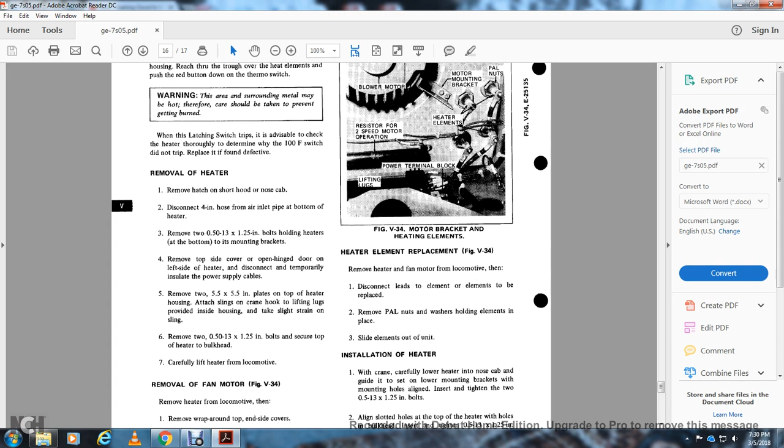Take slight strain on the sling and remove the 1/2 inch by 13, 1 1/4 inch bolts securing the top of the heater to the bulkhead. Carefully lift the heater out of the locomotive.

Removal of the fan motor: remove the heater from the locomotive, then remove the wrap-around top, end-side covers. Loosen and remove the set screw holding the fan on the motor shaft.

Disconnect the motor leads at the motor. Remove the 6 mounting screws holding the motor mount to the heater housing. Pull the motor from the unit; the fan will remain in the unit.

Loosen the bolts in the mounting bracket band and remove the motor from the mounting bracket.

Figure V-34 shows the motor brackets and heating elements: the blower motor, the motor mounting bracket, the pal nuts, the heater elements, the power terminal block, the resistor for 2-speed operation, and the lifting lugs.

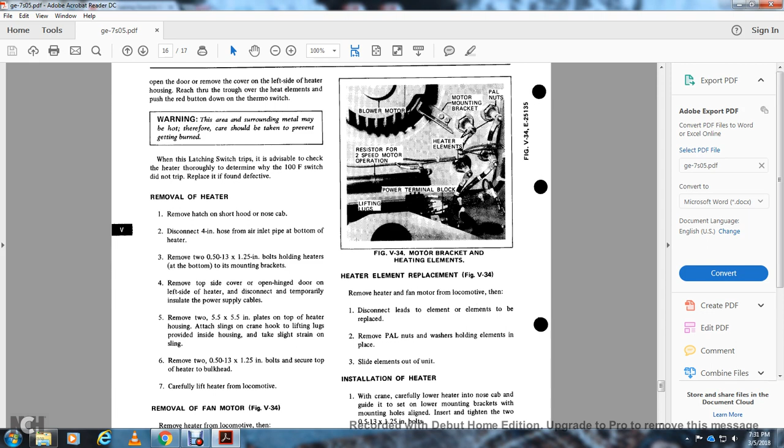Heater element replacement, Figure V-34: remove the heater and fan motor from the locomotive, then disconnect the leads on the elements to be replaced. Remove the pal nuts and washers holding the elements in place, then slide the elements out of the unit.

Installation of heater: with the crane, carefully lower the heater into the nose of the cab. Guide it to seat on the lower mounting brackets with the mounting holes aligned, then insert and tighten the two 1/2 inch by 13, 1 1/4 inch bolts.

Align the slot at the top of the heater with the holes in the bulkhead, insert and tighten the 1/2 inch 13 by 1 1/4 inch nuts and bolts. Insert the power cables into the heater connector per the schematic diagram.

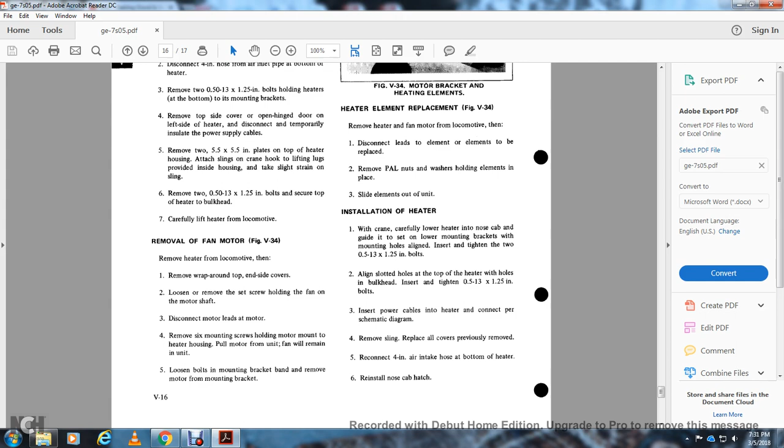Remove the sling and replace all covers previously removed. Reconnect the 4-inch air intake hose at the bottom of the heater, then reinstall the nose cab hatch.

Installation of fan motor: reverse the removal procedure. Installation of heater element: reverse the removal procedure.

Troubleshooting: use troubleshooting table 5.1 to help identify the possible cause of the trouble. Once the cause is determined, follow the procedure for eliminating it.

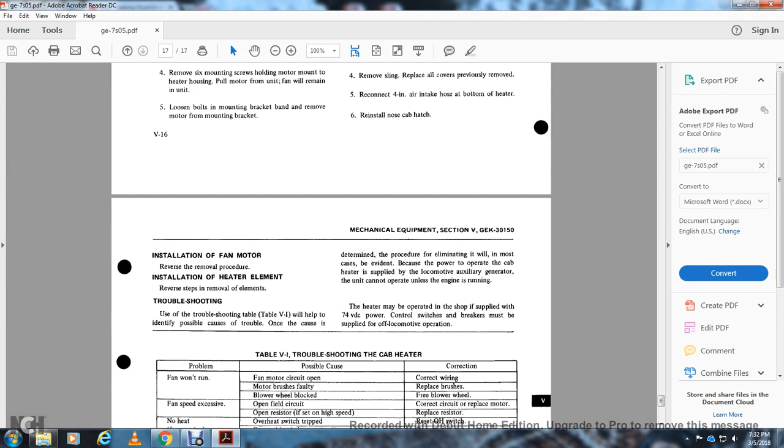Note: because power to operate the cab heater is supplied by the locomotive auxiliary generator, the unit cannot be operated unless the engine is running. The heater may be operated in the shop supplied with 74-volt DC power; control switches and breakers must be supplied for off-locomotive operation.

Fan won't run. Possible cause: fan motor circuit open, correct wiring. Motor brush faulty, correction: replace brushes. Blower wheel blocked.

Fan speed excessive, overspeed: open resistor set on high speed, correction: replace resistor. No heat, fan running.

Overheat switch tripped: reset the overheat switch. Open wiring in heat circuit: correct wiring. Defective heater interlocking circuit: correct the circuit. Defective heating element: replace the elements.

Low heat, lower than normal: open wiring into one or more elements, or open/defective heating element, possible cause.

Unit overheats when fan is on low or high speed: airflow restriction or open circuit on the overheat switch wiring, correct wiring.

Breakers or contactors fail to open on signal: repair or replace breaker or the contactor. Overheat switch failed: replace the overheat switch.

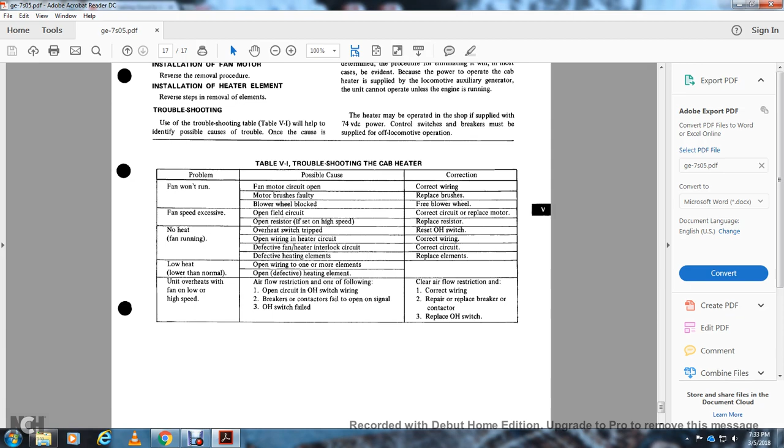And that completes Step 5 of the GE-series instructions, Section 5, Mechanical Equipment.